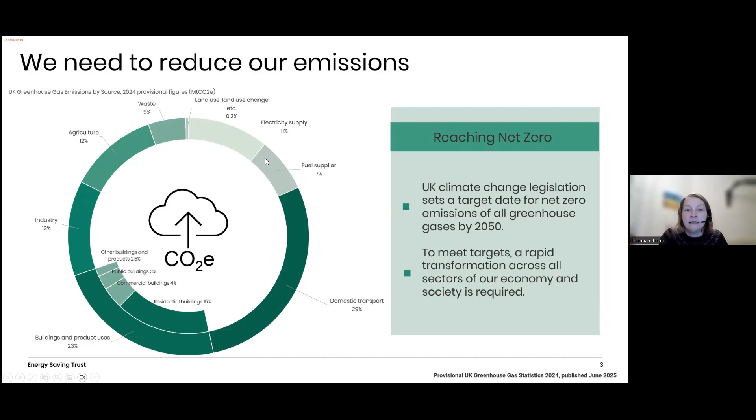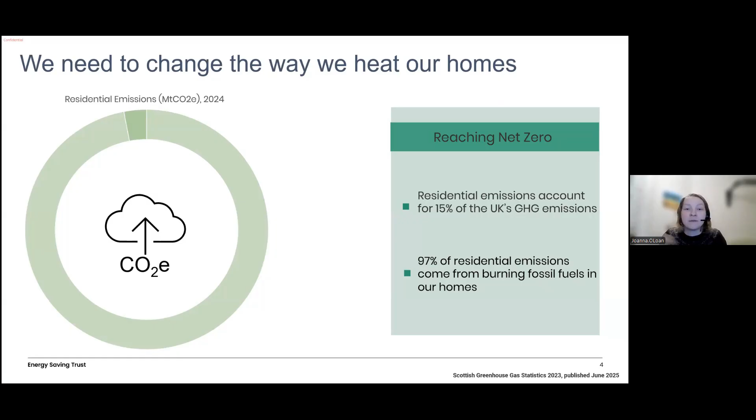Here, I've listed the UK's greenhouse gas emissions by source, from UK government statistics. And you'll see residential buildings are around 15%. So 15% of our total emissions that we're producing every year in the UK are coming from our residences. And I wanted to dig a little bit more about what residences mean. Is it me throwing away my banana skins, is it me watching telly? Well, really most of that other stuff is captured elsewhere: my car might be under personal transport, that banana skin might be captured under waste. Me watching the telly will be captured under electricity supply.

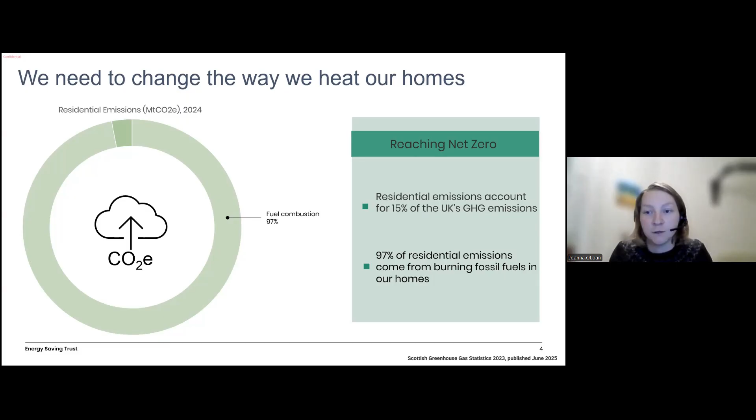So what that 15% is actually describing, 97% of that is just fuel combustion, which is largely just heating our homes and our hot water. So providing heat and hot water to our homes in the UK is responsible for almost 15% of our total emissions. So something about what we're doing in our homes isn't working, and we need to change that. So most of our combustion at home is for keeping warm. Space heating takes up the majority of that.

Hot water is a smaller number, but it's a steady year-round need. We all need warm water for bathing and washing up and having hot water at home. And cooking is also a small amount, but it is there. A small share. Cooking with gas does represent a small amount of combustion.

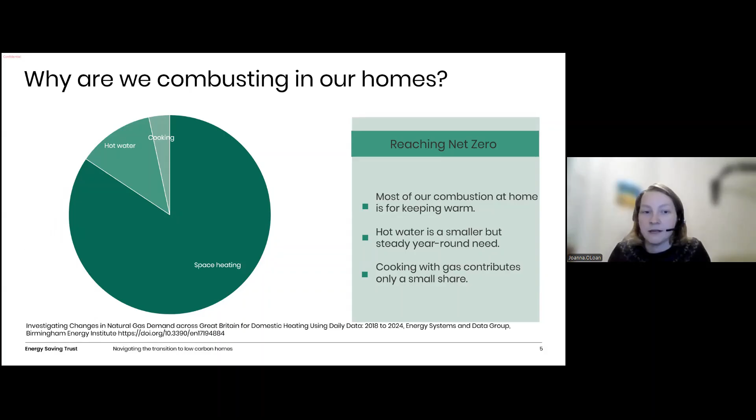So we need to change how we're heating our homes. And for most of us, that's with gas-fired main heating. So around 86% of homes in the UK are currently using a gas boiler to provide their heating and hot water. Around 8% are using electric heating. There are still, particularly in more rural off-gas areas, lots of oil-fired systems out there as well.

And there are some communal district heating and heat networks, but it's not a very common way to heat homes in the UK. It is a bit more mainstream in other countries, but it's this big gas-fired main heating that we're trying to change. It's really the big one that will give us the biggest shift, the biggest volume in terms of changing.

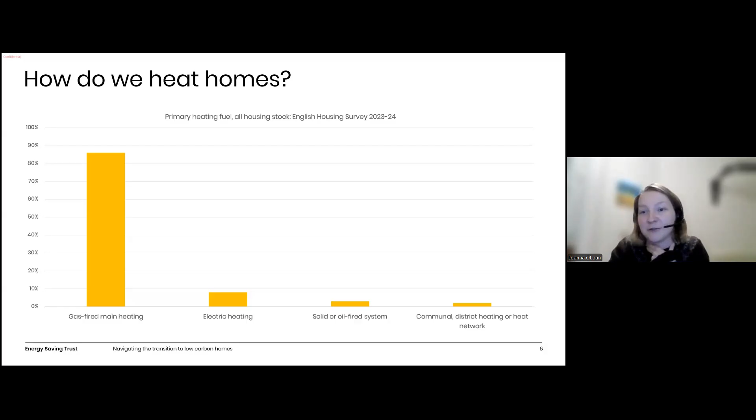So what options are there to the person that currently heats their home with a gas boiler is the question. I think that's really your question there, Rosie. To me, it's all about electricity. So right now, if you heat your home with oil, you're responsible for around 4 tons of carbon dioxide every year into the atmosphere.

If you heat your home with gas, you're responsible for around 2.8 tons of carbon dioxide each year. If you heat that home with electricity, it's about 2.6 tons of carbon dioxide each year. And if you heat your home with a heat pump, you're responsible for about 0.8 tons of carbon dioxide each year. So if you today were to choose a heating system purely based on the lowest carbon emissions, you would opt for a heat pump.

That is our lowest carbon emissions heating system available of the tools that we've got today. So this is quite often why this one is flagged as the front runner. But this is based on today's statistics. In order to calculate the emissions for our average space heating, we burn oil and we count the amount of emissions that come out of burning that oil, similarly with gas.

But with electricity and with the heat pump, in order to calculate its emissions, because it's not actually combusting anything, it's not burning anything at source, it's using electricity. And so we need to look at what carbon is being produced when we generate our electricity in order to understand what emissions our electricity and our heat pump sources are responsible for producing.

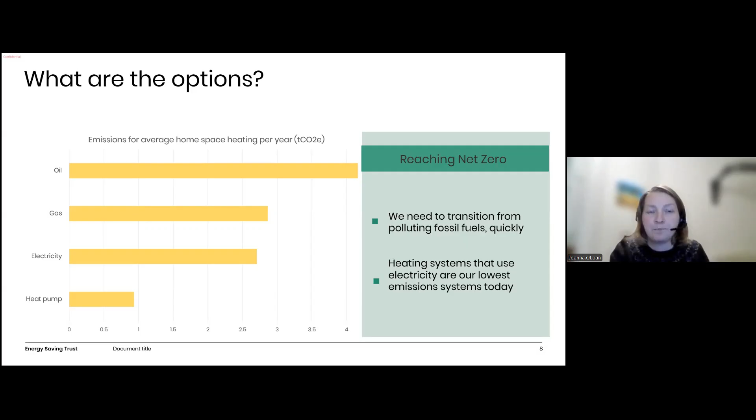And to do that, it's a bit complicated, and the story has changed over the years. But this graph charts the total emissions that come from all of the sources of our electricity production since 1996. So in the dark blue, I've got my fossil fuels, so my oil power plants, my gas power plants, my coal power plants. I've got my nuclear power plants in yellow, the electricity that they're generating.

And in all the greens, I've got all my renewable sources. So my hydropower that we've had for over 100 years, our onshore wind, our offshore wind, particularly offshore wind, we've had a huge uptake in, but some wave and tidal power, some solar power, some thermal renewable. And then in grey, I've got little bits of trading that we do that's a bit harder to track. But you'll see the picture overall of all the different sources that have made up our electricity.

In 1996, clearly a fossil fuel dominance and even a coal dominance within that. That one at the top is our coal part of the graph. So you'll see that coal really dominated, and even more so if I was to extend this graph backwards. Before 1996, coal really was the dominant power supply for electricity. So electricity was a really dirty fuel in the UK even in 1996.

If I fast forward along to kind of 2014 at the bottom of this axis, you start to see this, what I'm going to term the rise of renewables. The green line starts to take up more of the area. More renewable generation is producing more of our electricity. At the same time, coal is really being phased down. And as of this year, our last coal power plant was shut down in the UK forever.

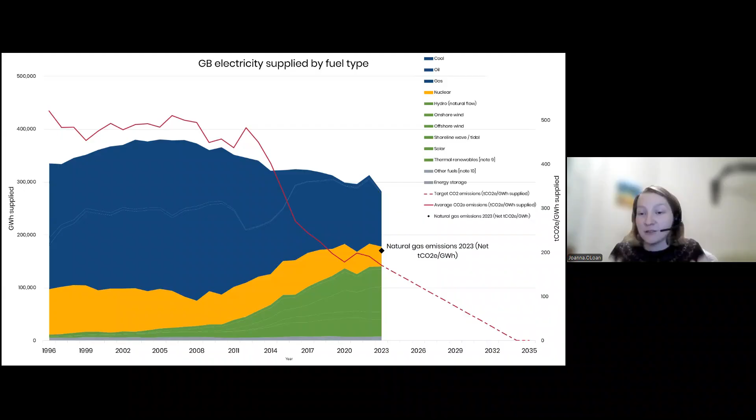By 2035, the UK government has targeted this to be almost zero. There is a small amount that's allowed. I think it's 0.001, some other zeros in there. It's a very small, negligible amount of carbon emissions associated with our grid. So by 2035, the plan is that our electricity grid is a zero emissions energy source, that we'll be able to use that electricity however we need to without being responsible for any carbon emissions, at least from the sources. Obviously, there's some around the infrastructure and how we build all this equipment, but the actual source of electricity would be a zero emissions electricity grid.

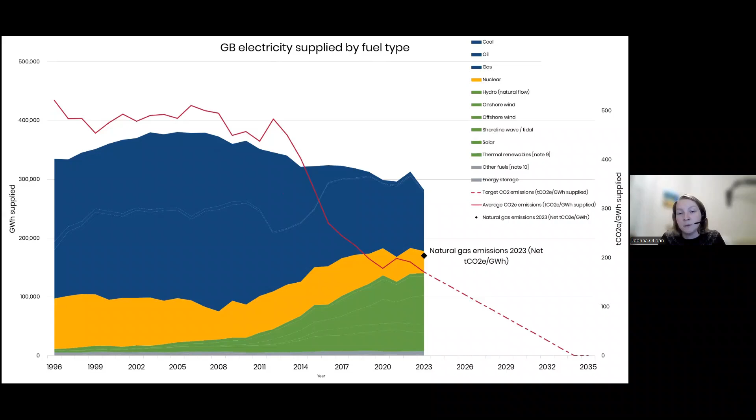Exactly how this mix will look is going to depend on the government choices in the next decade or so, whether we see more of this yellow nuclear in the graph or more of this green. Exactly what the split is going to look like remains to be seen. But the plan is that by 2035, there'll be none of this blue on this graph at all. All the electricity will be provided by zero emissions sectors. So really your choice is electricity. And it's especially exciting in this year of 2035. Apologies, I've put 2025 in this chart here, but it should say 2035.

In 2035, I've reimagined the typical house, and I've said that if I still heat that home with oil, well, I'm still responsible for roughly the same emissions as I would be today. I'm still burning the same amount of oil to produce the same amount of heat. Nothing's really changed in 2035. And similarly with the gas, I'm still responsible for about 2.8 tons of carbon dioxide every year just to keep my home nice and warm.

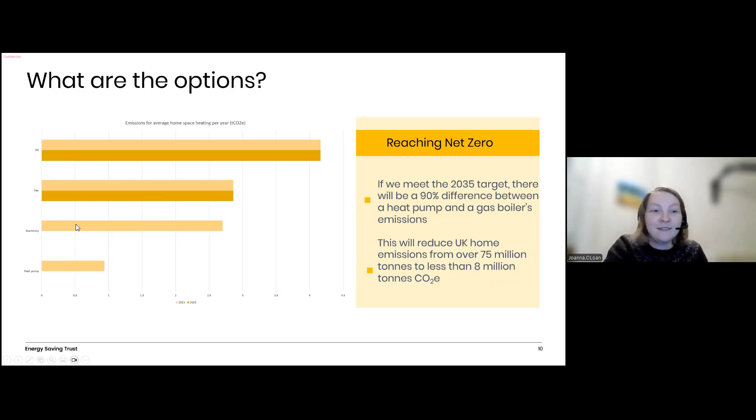So much so that if we were to meet that 2035 target, there will be a 90% difference between the emissions associated with a heat pump and the emissions associated with a gas boiler in a home that needs the same amount of heating. So a home otherwise exactly the same, same levels of insulation, household habits being exactly the same, a 90% difference in the amount of emissions associated with that home.

And if we manage to convince everybody with a gas boiler to replace that gas boiler with a heat pump, that would reduce UK emissions from over 75 million tonnes to less than 8 million tonnes of carbon dioxide a year. So really significant savings available to us if we opt for heat pumps. And even where we think heat pumps aren't suitable options, because there are some exceptions, there is some housing, there are some circumstances where heat pumps aren't the right option, electricity still has a really important and significant role to play because it's that low emission source.

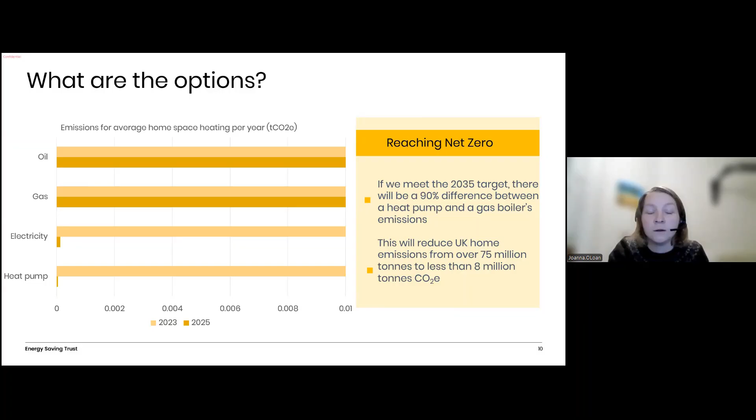So really, to summarize what our options are here is really just to think electricity, but the most efficient electric heating system is the heat pump. So that's why we end up thinking about heat pumps so much: we know electricity is the source, and already today it's our lowest carbon energy source. We hope in time, or the plan is by 2035, that will be an even lower carbon emission source. So we'll have a really green energy source available to us that we can use to heat our homes and heat our hot water. Your options are electric heating, but obviously carbon's not the only thing to consider.

You're also going to want to consider your running costs and how much energy you're still using. And that's when the heat pump really demonstrates just how efficient it can be. So heat pumps are the thing that we're always talking about because they use electricity, which is going to be a low carbon source, and they're the most efficient way of using that electricity to provide heat and hot water for our homes. So this is why they're our front runners and why they're so supported by governments, both in the UK and globally, why heat pumps are emerging as the preferred option, but they're certainly not the only option. Anything within that electric wheelhouse is going to have a role to play. So that's your options really.

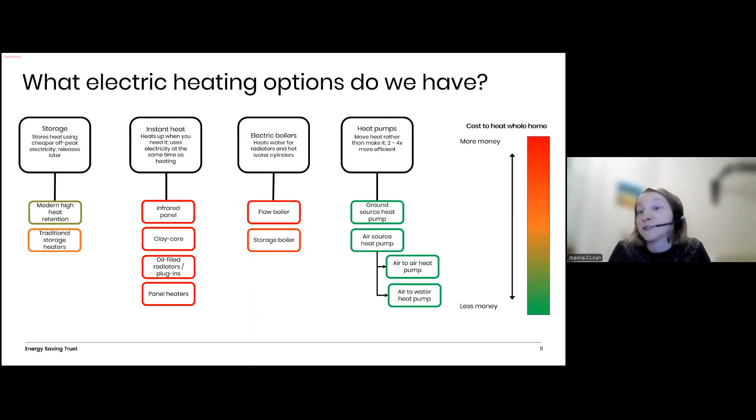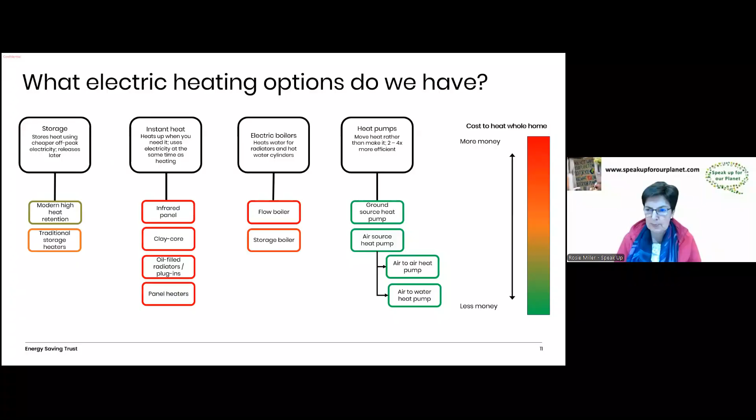Okay, that's great. And I'm sure we're going to get questions about how some of these non-heat pump things work. We'll come back to them, I think, and ask a question about heat pumps, because one of the options we had on the poll was, why would you not want a heat pump? It has often been said that people have heard stories where the outside temperature gets to about 5 or 6 degrees C and the heat pump couldn't quite cope because of X factor, Y factor, etc. And so people are nervous that they're going to spend a lot of money and be left with a still cold house doing expensive spot heating. Those are stories from existing heat pumps, probably more than 2 years old. What's been happening in heat pump technology? Has it been such that this is now not a problem, or are there still problems like this to be overcome? Yeah, it's a good question.

And I'd like to answer it by comparing heat pump adoption from elsewhere. I presented this a few times to advice organisations in Scotland, but I still think it's quite useful even in a UK context, as Scotland is the coldest part of the UK. So if we can get them working in Scotland, we can get them working in the rest of the UK. And what I wanted to do was compare: why don't we have heat pumps everywhere in Scotland like they do in other countries, and what can we learn from other countries and their adoption.

So I've picked Norway. The reason is there are quite a lot of similarities between Scotland and Norway. Both have long, cold winters. Both have frequent wind-driven rain. Western Norway is often wetter and windier than Scotland in any given winter season. And sub-zero temperatures are quite common, particularly in areas like Braemar, the Northeast Highlands, the Aberdeenshire area, always the bit that gets the medal for the coldest part of the UK in any given year. So if we can get them working here in temperatures similar to Norway, maybe we can get them working. In terms of geography, the rural spread and small urban centres are quite similar to Scotland as well.

It's probably a little bit more concentrated in urban environments in Scotland than it is in Norway, but it is still quite similar in terms of how many people are living rurally, islands far away, difficult to access, proper rural, and smaller cities, not kind of big. Neither of these countries have big international cities.

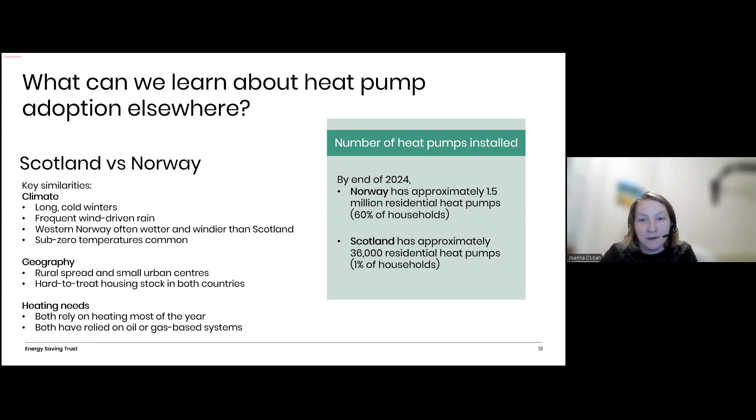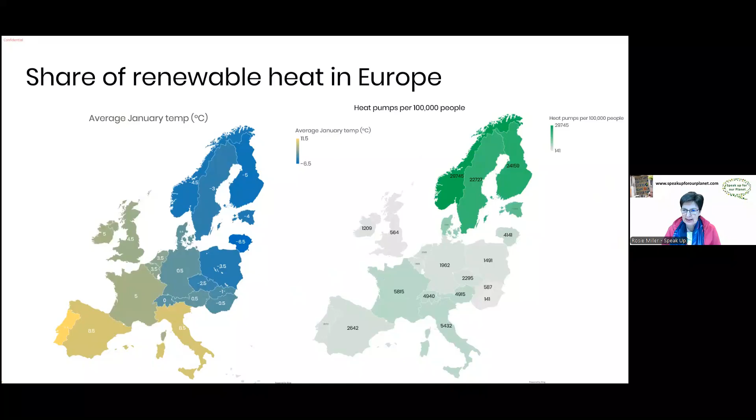Yeah, also from an engineering point of view, but also in practice, as we can see, the adoption in these very cold countries. Okay. So I'm getting the message that basically most of us could move to a heat pump. Are there types of houses and accommodation where it won't work or won't be practical? So it's not so much, I guess, the technical heat pump won't work, but it's either not practical or there's some other reason. And could it be just really low standards of insulation mean it won't work?

Yeah, absolutely. So I believe one of the biggest hindrances to adoption, there are a few, but one of the biggest ones, particularly when we're trying to convince people to move away from gas heating over to heat pump heating, is your energy bills. And no matter how much money you have, nobody wants to be paying more than they have to for their energy bills. Everybody wants to make sure that they've got their energy bills as low as they possibly can to still have a nice, warm, comfortable house.

Now, one of the big differences between these countries and our country is the difference in ratio between the gas and the electricity price. So there are countries with more expensive electricity than us. There are countries with more expensive gas than us. But we do have in the UK one of the biggest differences between the electricity and the gas price. We're about 4 times the price right now. So for every unit of gas that you burn, you would pay around about 4 times the price for electricity.

Now, heat pumps use electricity. They use it very efficiently. Usually for a heat pump install, for every unit of electricity it uses, it can push 3 units of heat into your home. So you can kind of divide your electricity price by 3 to work out roughly what you're going to be paying per kilowatt hour for your heat from your electricity. But if we've got a ratio of 4 times, what we're trying to get is heat pumps to be 400% efficient, 4 times the efficiency, which is a huge ask of any heating system. But certainly the big ratio between electricity and gas is one of the barriers.

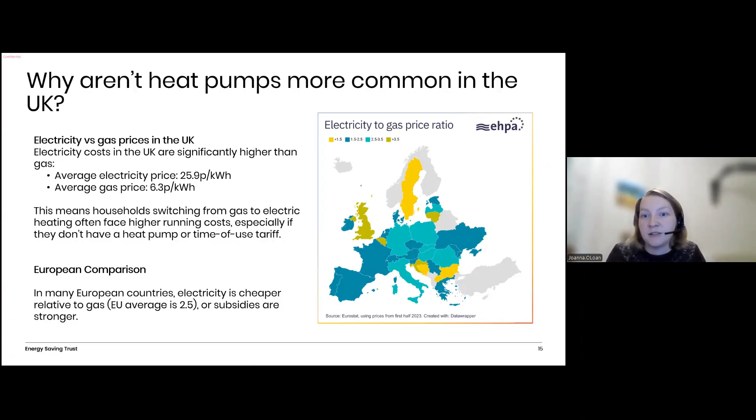They don't need the heat pump to be as efficient as that in order for it to be the more attractive financial option for them. Yeah, yeah. Okay, I can see Cynthia's asked a good question on that, but I'm going to come back to that.

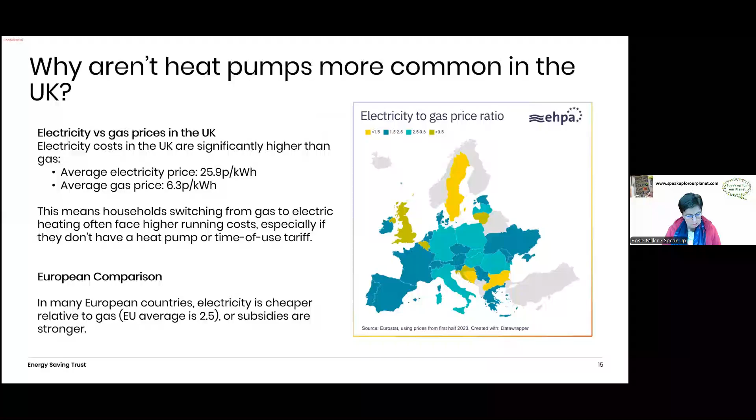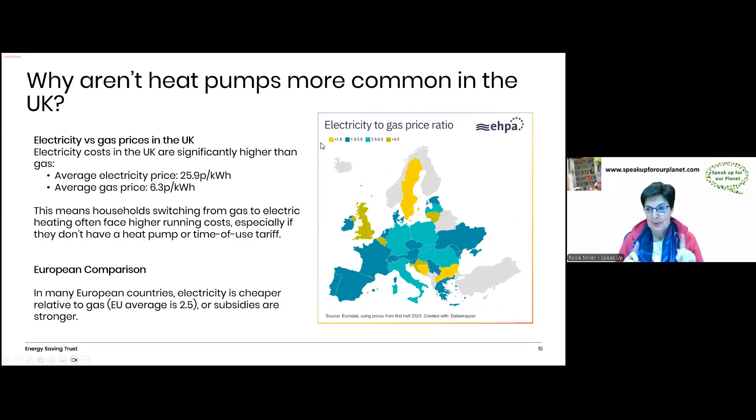One of the other points is this disruption, and none of us likes to change. I remember we had an oil and a gas boiler in the 1970s when oil got disrupted. So we put both in. So we were a dual-fired family home, which is unusual. But I think the big thing was it's a disruption of potentially having to learn something completely new. And I know just moving to an electric car feels very strange. This seems like a much bigger change of habits.

How much change will be needed typically to move to a heat pump? Do we have to think in terms of having more insulation? Do we need more physical space? Do we need different sorts of radiators? What's the biggest change physically people experience?

Yeah, sure. So for most people, the option that they'll be considering is something called an air to water heat pump, and we say that to differentiate it from something like the ground to water heat pumps, so heat pumps that are dug underground and use pipework, or air to air heat pumps, which are basically air conditioners but working in reverse. But the majority one will be the air to water heat pump.

Now, in order to get those really good efficiencies, that 3 plus, and if you're somebody that's trying to get 4 plus to really reduce your running costs, the secret is trying to get the flow temperature, the temperature in your radiators, as low as you possibly can. Now, to do that without feeling cold inside, one, run your heat pump for longer. So it's kind of on all the time, which is quite different to the advice we would give somebody with a boiler, but also have really big radiators. The bigger the radiator, the more flow that can be going through it, the more it can dump that heat out without having to be so hot.